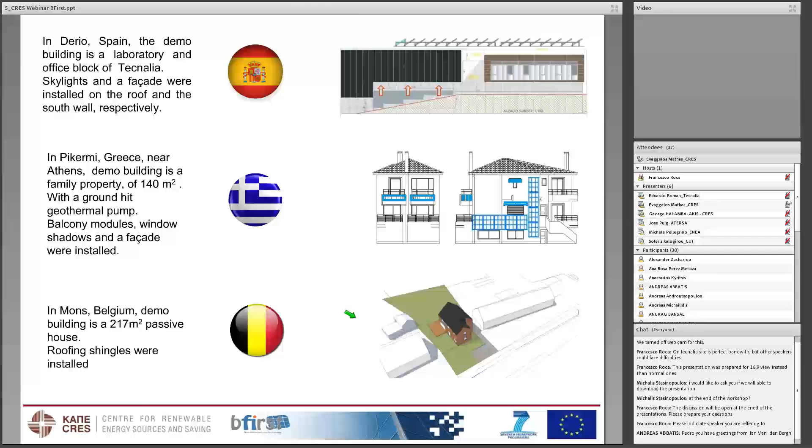Starting from the Spanish side, this is the name of the building. It is in Zamudio, and it is composed of two buildings. One is for testing laboratories and the other one is for offices. The latter one is the one with the ventilated façade and skylight products. So there are two PV installations there.

The southeast façade has been covered with an innovative ventilated façade. This solution combines an aluminium standard construction system, which is a bit different than the one that we have used in Greece. And the concept is based on the direct integration of composite module over an aluminium component by ASTRAWALL. The installation includes 34 modules, a total power of 2.5 kilowatts, and 20 square meters. Estimated energy production is 2,100 kilowatt hours per year.

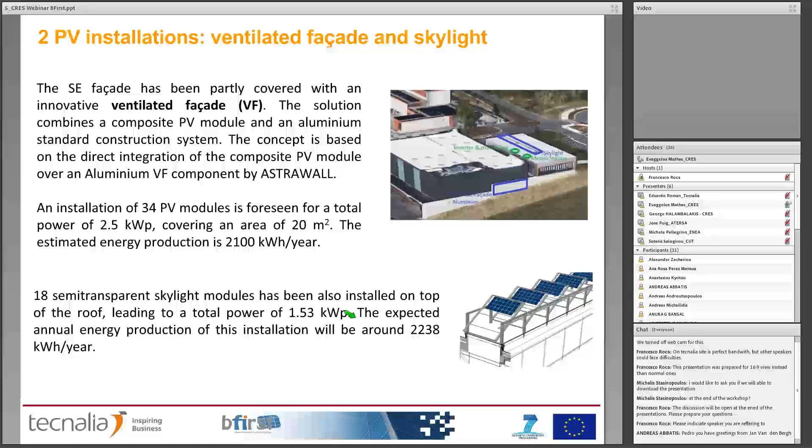You can understand that these modules, almost all of them for all sites, have been installed from the middle of last year, so we haven't got for any of the sites annual data for the real annual production. Estimations have been done for all of them using the PVGIS software. And let's go to see some more pictures.

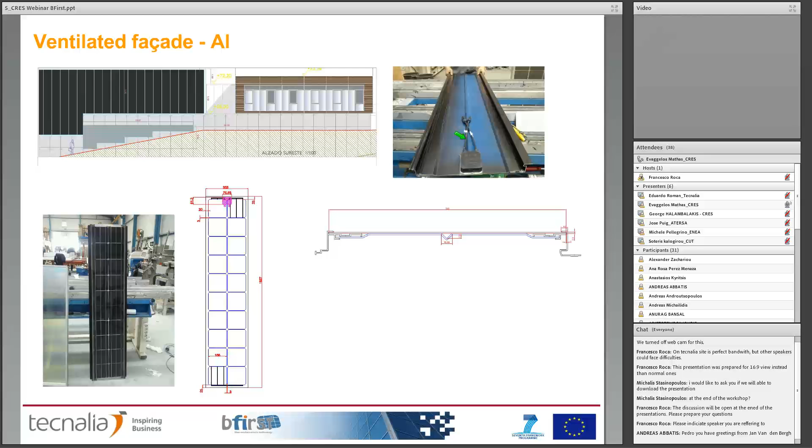Here you see where the installation takes place here, and you can see a man standing here just to give you a sense of size. This is the module, these are its drawings, flat and side drawings, and this is the back of the module. These are a few pictures from the construction operations.

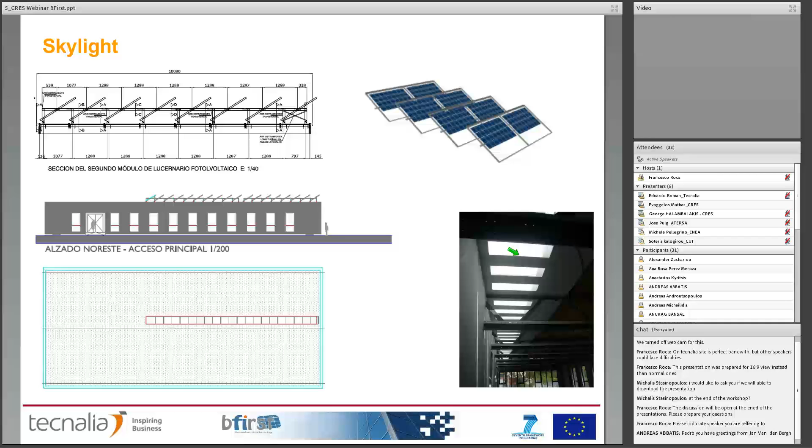This is the skylight on top of the building. You've already seen this sketch of how it is designed, and this is the view of the skylight. Here is the view of the skylight from the inside of the building looking towards the top, the roof. Okay. Here is the design again.

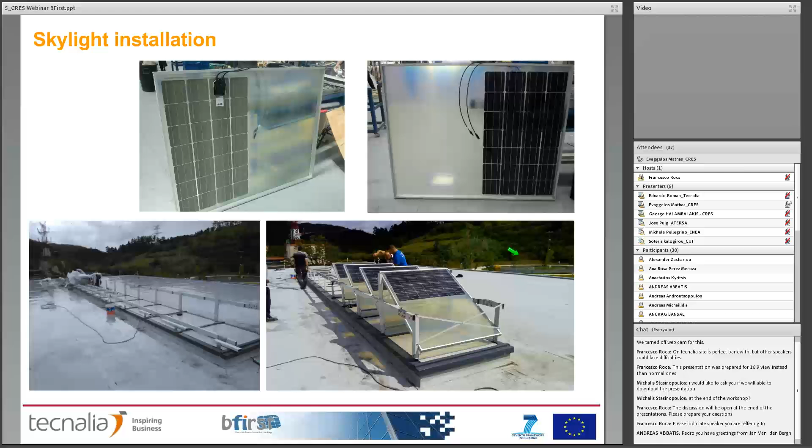Having this in mind, it means that there is no point of installing more power than necessary, and we will have a look at that later at the diagram. What does that mean? So, as it says here, with zero grid injection, there is no economical sense as far as the Spanish legal framework for photovoltaics is concerned.

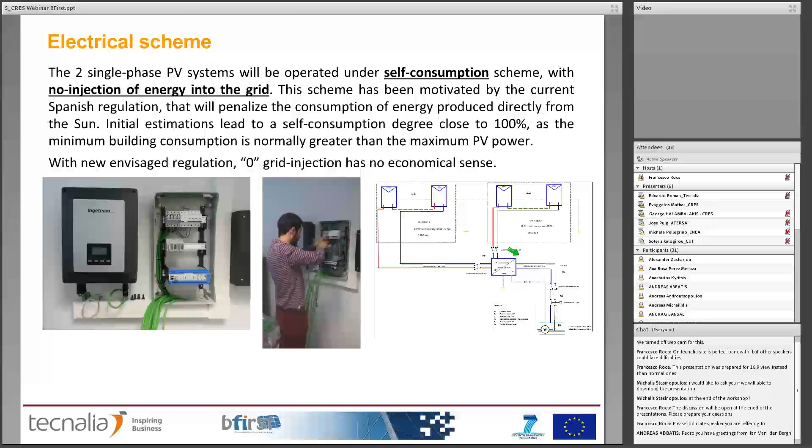There is a monitoring system, and it is important to know that it exists in all three systems. All demo sites are monitored for a long period of time, at least 6 months before the installation of the PV systems, just to get an idea of the consumption profile of each demo site, of each building. And then monitoring continues with the PV systems installed in order to see peaks, balance of energy and power, etc.

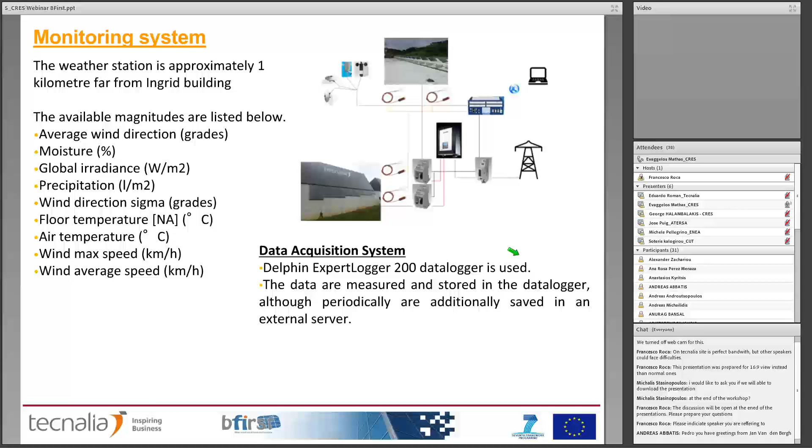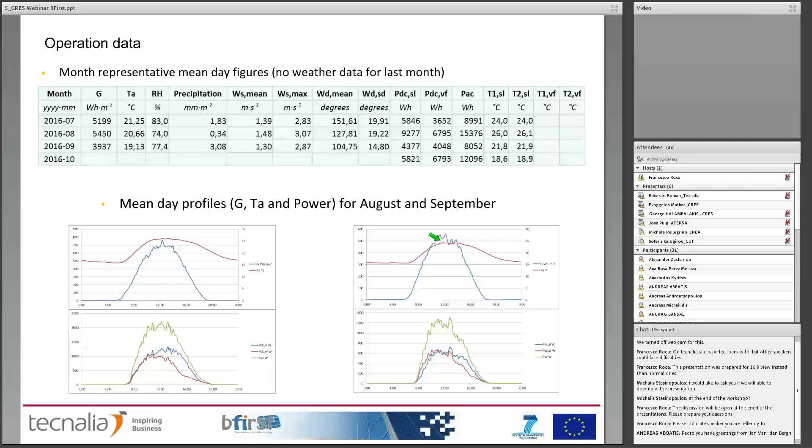Let's come now to the Greek demo site. The building is a low energy consumption residence, completely designed and built by Heron, and it's equipped with a geothermal heat pump which covers the heating, cooling and hot water needs by 100%. It's an interesting case, this house, because it is 100% electricity consumption. There is no other form of energy taking part in its use. It's fully electric, with a geothermal pump.

So it's quite important and interesting to have a PV system installed there under the net metering law that has been existing in Greece for the past year or so, knowing also that its mean annual consumption is about 3 to 3.5 megawatt hours per year.

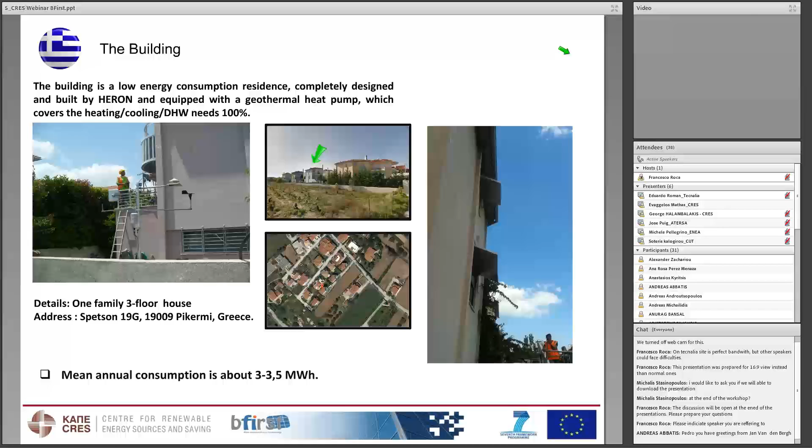We will see the systems installed: the shadings here, the shadings here and here, using just a cantilever system to hold them in place, and they're held in place also there. The façade system and the balcony system.

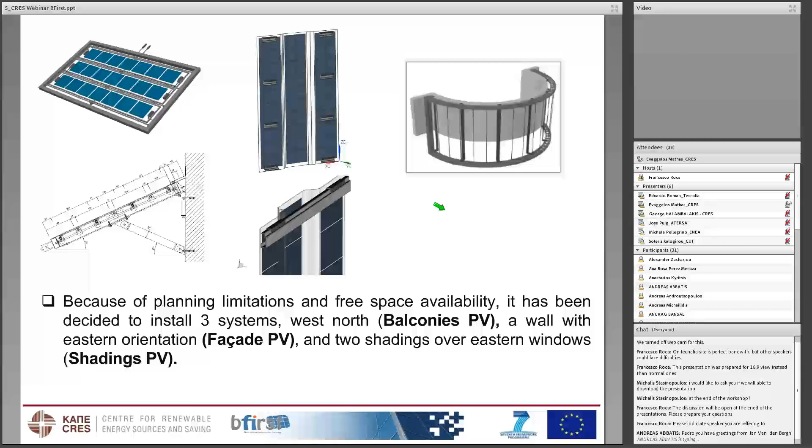It's important to note, and you will see that in the next slide, this one, that these panels here, the façade panels and the two shading panels, are at right angles to the balcony panels. So here are the façade, here are the shadings, and here are the balconies at 90 degrees to the other. You realize that such a system could not be connected to a single inverter. You would have great problems in production.

So the solution of microinverters was chosen, as mentioned earlier by Jose, so that not only each system produces its maximum available, but also it doesn't affect the others, not only between systems, but even within particular panels. And in this way, we have the ability to monitor each particular module by itself. That is very important for monitoring and scientific purposes.

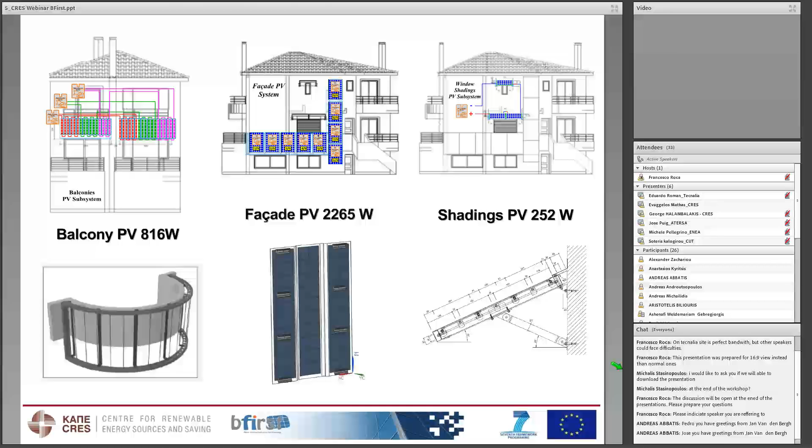Monitoring again is present, as I said earlier, in all three sites. This is the design of the monitoring system designed by CRES. It is based on a series of controllers which are termed SmartStruxure, and they are made by Schneider Electric. They are network automation servers with TCP/IP and support IPv6 technology, being a fully modular model that you can add as many more sensors as you like.

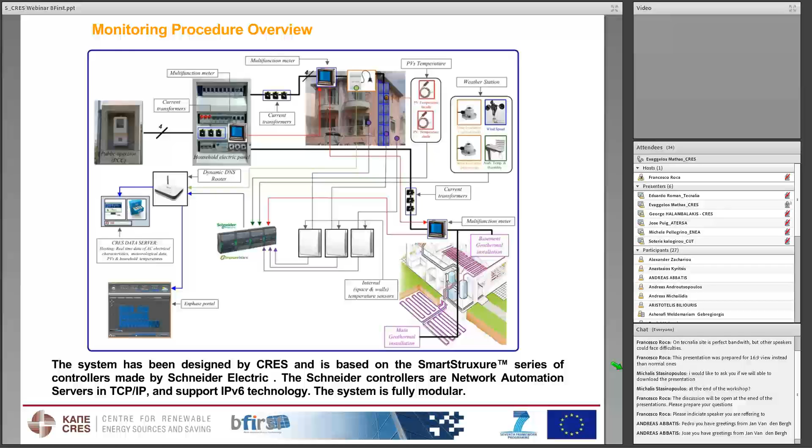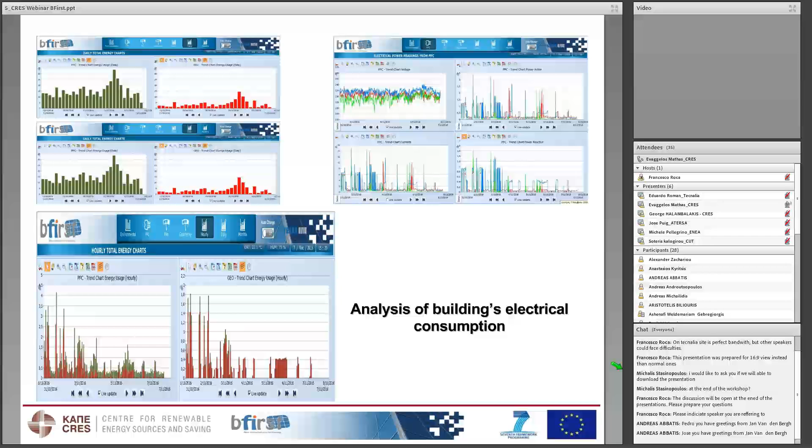Here we see the monitoring screen developed by CRES. This is the electrical consumption data of the building, that is consumption data. This is the internal, this is the meteo data and internal comfort conditions. Internal comfort conditions are important for one reason that I will explain now.

Here you see the temperature in two lines. These are two thermometers which are placed inside the house on the wall that has the façade. One of them is on the wall that has the façade in front of it, and the other one is on the side wall that hasn't got the façade on it.

So by using these two thermometers, we're trying to establish if the façade, that is the PV temperature that goes up, as we know, during operation, it can go up to 60 degrees and even more, gives any effect to the internal side of the wall of the house. Up to now, if you see here in the numbers shown, the difference in temperature is about half a degree at maximum. This, of course, is the external environmental temperature of the site.

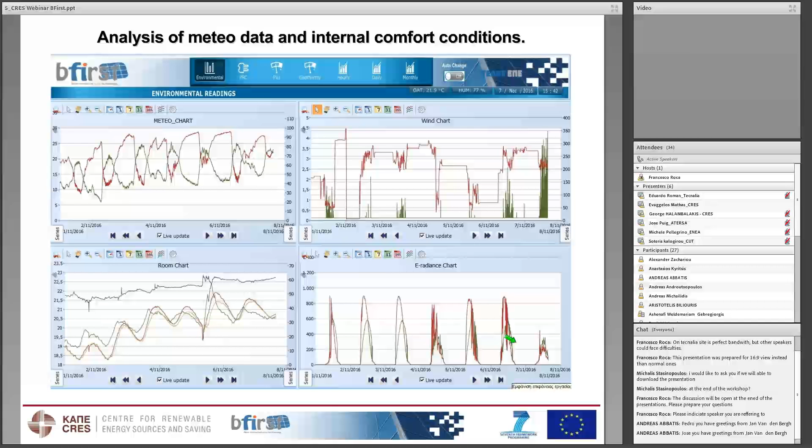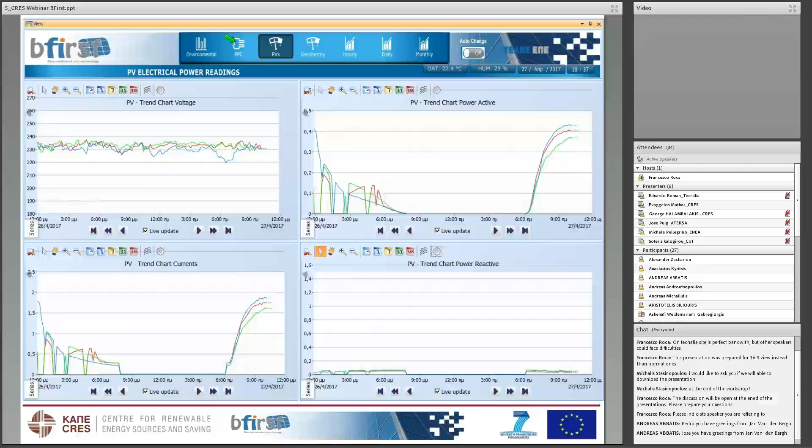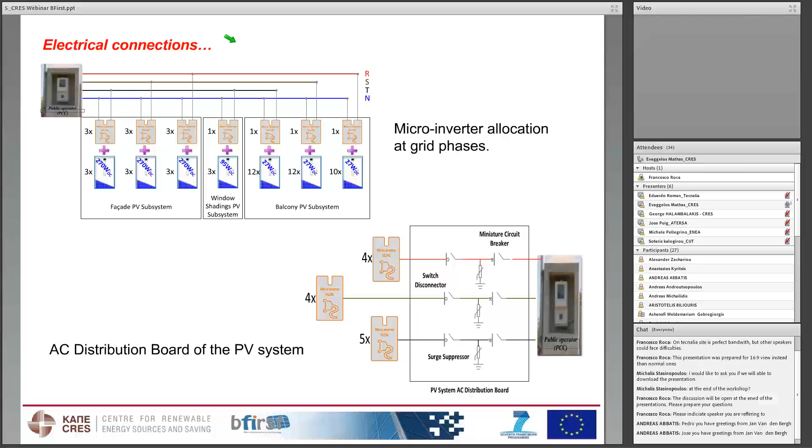You see that at around 11 o'clock, the three systems, because the microinverters are packed together in three SMA multigates, are producing normally. And the electrical connections are done in that way to the microinverter allocation at grid phases and to the AC distribution board of the local grid operator. And this is also today's picture from the Sunny Portal of the SMA microinverters.

You can see the system here, that is the façade, and this is a representation of the balconies. And if you just select one of the panels, you see all its characteristics. For example, it is made by Acciona, it is placed at -45 degrees orientation at an angle of 90 degrees, that is vertical, its serial number, its power, and the Sunny Multigate, that is the system from which we get the info.

This is important because if you check the numbers shown here, you will see, as mentioned earlier, that actually a couple of façade modules are producing less, for the simple reason explained earlier by Jose, that the two window shading systems throw shadow on them, depending, of course, on the time of the day.

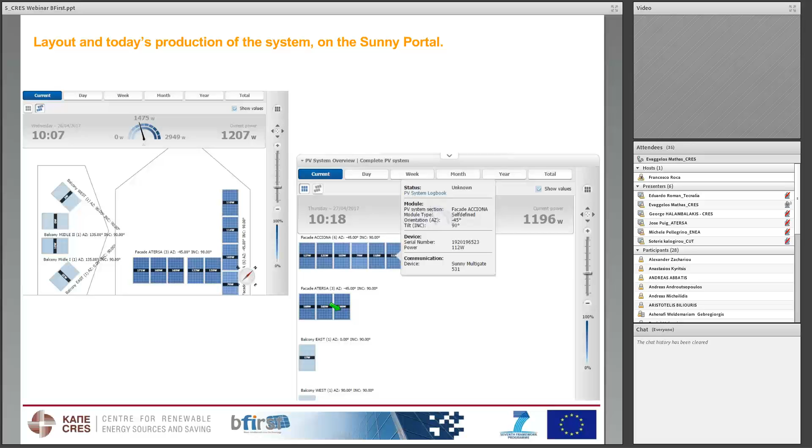It is also important to see here that we have the three Atersa façades, which use the same cells as the ones used in the other products, and their production is shown, and this is an excellent way to compare the two technologies, that is the one we developed and the one which is, let's say, normal to our products. This is the finished house. You can see the balconies and everything, and here in front of the house you can see the meteo mast that we get the environmental data from.

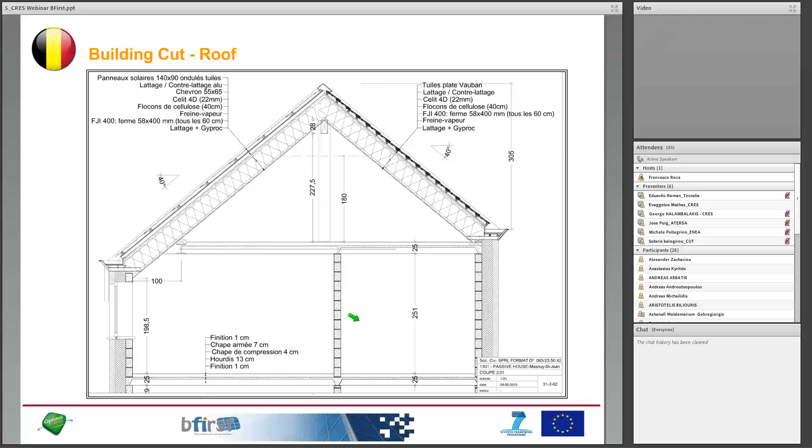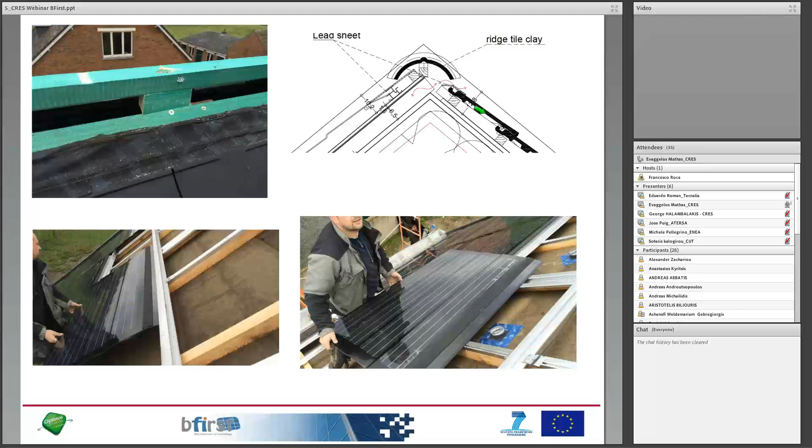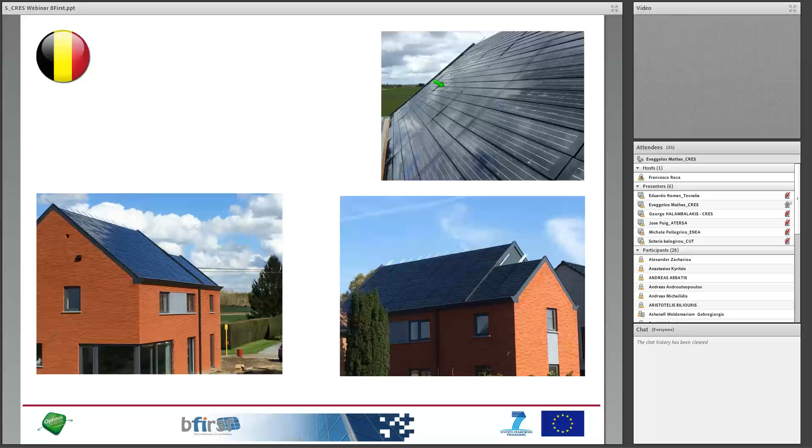We're going to Belgium now. This is the building roof, as you've seen before, and it looks very nice. The demo site in Belgium has a beautiful south-looking roof at a very nice inclination. So some pictures from the installation, the solution chosen for the ridge tile clay in order to be above the last PV panel, the last PV shingle. And another picture, this is a particularly beautiful picture of this demo site. It's not only a real but a very beautiful application of BIPV systems.

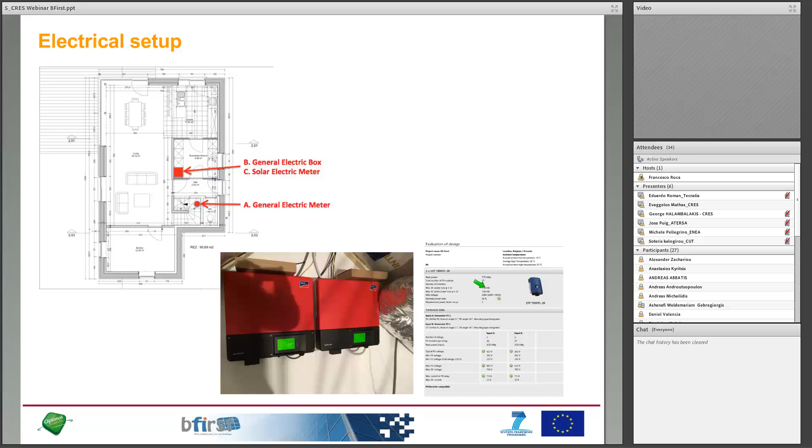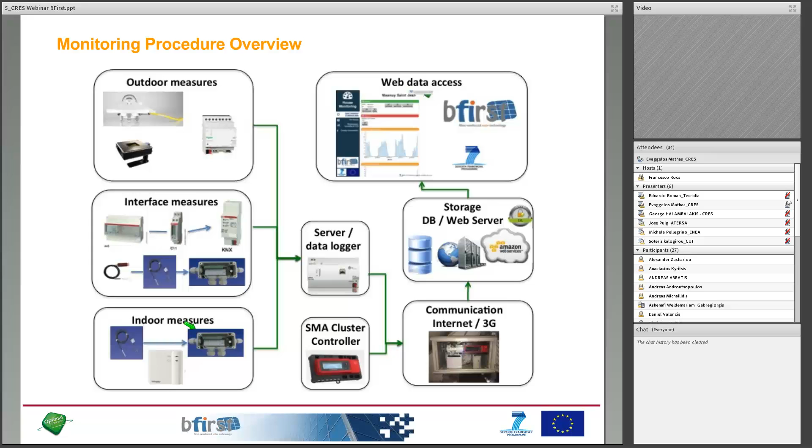Electrical setup is shown here inside the house at the top plan. These are the two SMA microinverters here under the roof, and here is the screen that the inverter brings out to the user. Monitoring, again, it's very important, is here again present. Optimal Computing designed a very nice web data access and a very nice monitoring system. Of course, all communication and monitoring of all three systems is on the internet.

And of course, he also used monitoring of the outdoor measured details and the indoor by placing some thermometers under the roof, here and here and here, in order to check that the roof underneath is not, let's say, heated up by the heat that is getting out of the modules, in a similar way that we did for the demo site in Greece. Here we see the thermometer placed on the roof before we placed the panel on top on this structure.